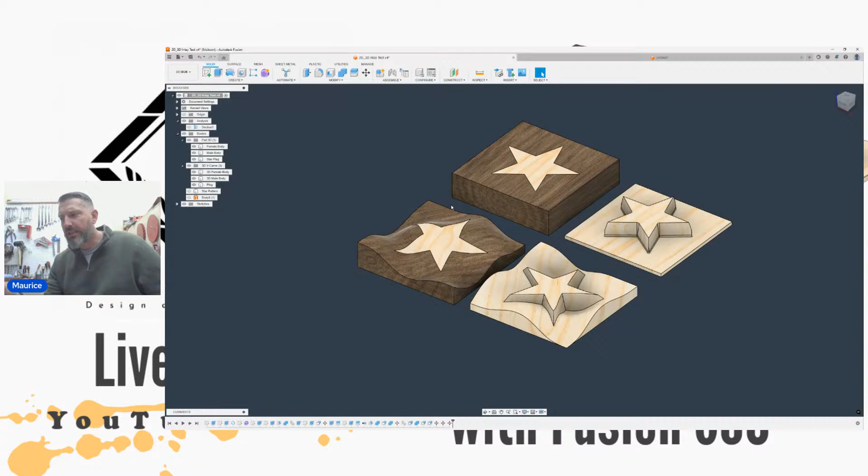So I ended up doing two versions, and this is just a 3x3 blank test that I'm going to be doing as soon as we get done with this. I was going to do it yesterday, and I ran out of time and I had some issues with my machine. So got that stuff resolved. I'm going to do this right after the live stream, and that'll probably be my next video for the entire steps for the design, and then getting into the garage and actually doing it with different tool paths and capturing all that.

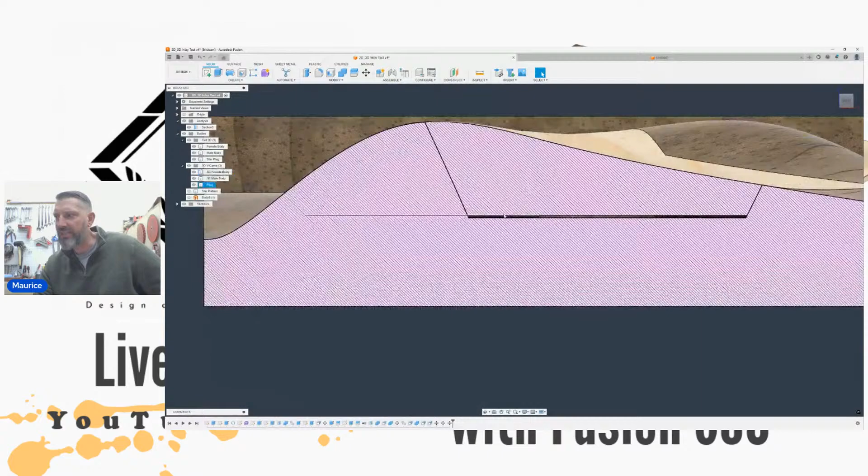So let's baseline this. Let's check the section analysis on this. You can see that I purposely left a glue seam on the bottom of this joint. Where it intersects with the male portion, the plug, and the female version, everything lines up for that curve of that surface. On the bottom, when it gets sandwiched down, I left 0.01 of a gap for glue squeeze out.

Now, I don't have a lot of history doing V-Carve inlays and the exact amount of gap that you should have and the tolerances between that. But I can adjust this later if it just doesn't work out, or if I need a larger glue gap or a smaller one. It all depends. So when I do these test cuts today and everything's glued and flat, I'm probably going to cut this board in half, just to see how the plug interacted with the female, and we'll see.

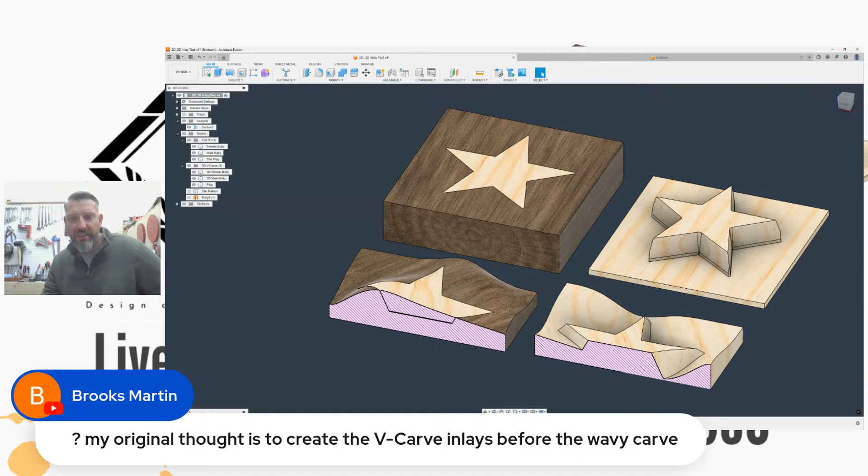So Brooks, my original thought is to create a V-Carve inlay before the wavy carve. So let's walk through that. That is the main reason why the star will come out deformed. It all matters on how the degree chamfer that you put on the plug interacts with that 3D surface. Depending on the surface, when the plug goes in, it will get deformed when it tries to go down into it, because it's entering at different points, and the chamfer is still there and is still valid.

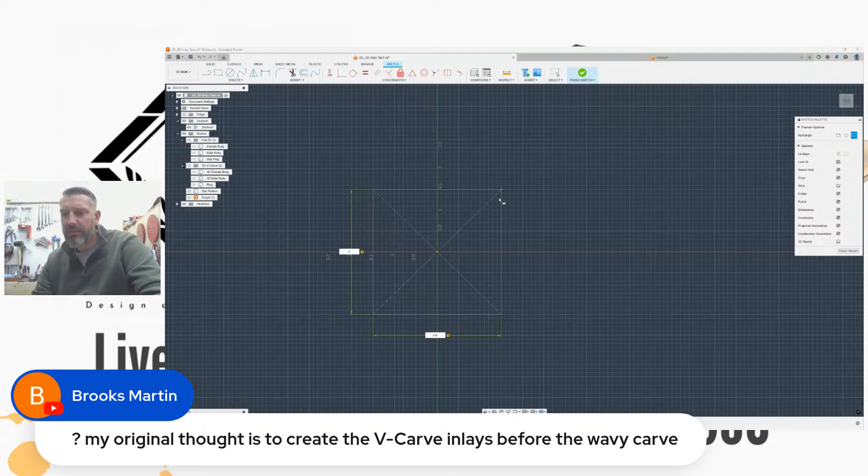So let's go ahead and we'll replicate that really quick. I'm going to hide all this stuff, and let's just do a sketch. I'm going to keep my original box of a 3x3. And then we're going to make this 0.75 thickness. So we'll extrude this up to 0.75. My section analysis is still on. All right, let's make this 0.75 thickness.

And then I already have the star laid out. So let's go ahead and we'll bring the star outline. Right now it's right on the surface. So I'm going to hide this body I just made, and I'm going to extrude this down. Let's go 0.3, 0.4. And with this, since we're going to use a 30-degree V-carving bit, I'm going to take this tapered angle and put it at 15 degrees negative. Let's go negative 15.

All right. So actually, let's bring this down just a little bit farther. Let's go all the way to like 0.7. I'm going to hit OK on that. Now, what I'm going to do is I'm going to bring this body back that I just made. And I'm going to put my 3D plane in, and I'm going to cut the actual surface out. So I'm going to use the split body.

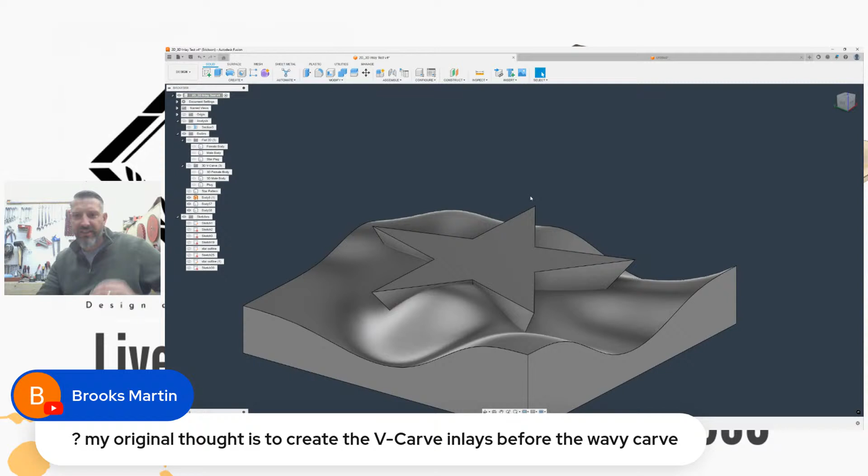But because it's constrained at a 15-degree angle, that angle enters this surface at a different degree. So what I'm going to do is I'm going to cut this into it. So I'm going to go to combine, and then the target body, and then I'm going to cut. I'm going to use this star with the angle that I want. I'm going to keep this tool. I'm going to hit OK.

So now I have the angle that I want, that 15-degree chamfer. It's cut into the material. And what I'm going to do is, I'll do that later. But because I cut it at a chamfer, you can see the outside line and how it interacts with the surface. It entered at a different point on the actual surface, and it deformed that star and how it looks.

Now the bottom of the pocket, because it's flat and it interacted with that body and it was flat, the star isn't deformed at the bottom. We don't want that. We want to keep this constrained to how it enters into the surface. So to visualize it, let's go ahead and I'll cut this star profile with the mesh. I'll extend it. That's fine. I'm going to delete this.

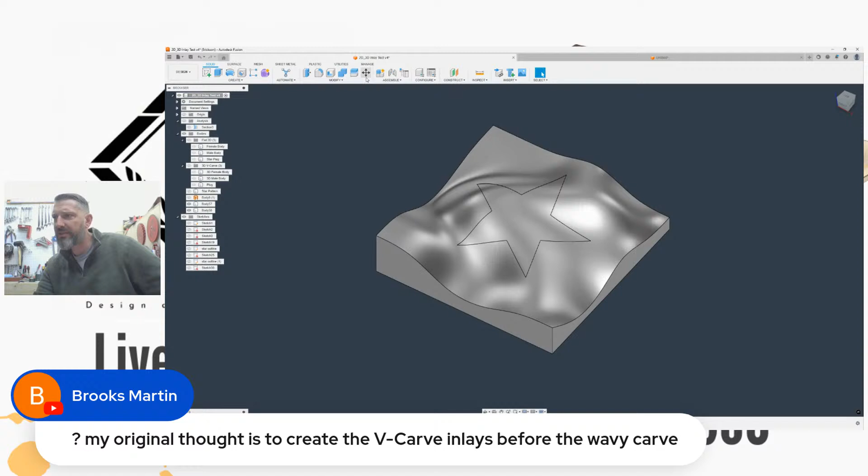So there's the star inlay. And you can see that this is just a little bit wider. This isn't perfectly flat or perpendicular to the surface. So let's put some material or appearance on this so you guys can see this a little bit better. Okay, so I went from this, and let's move this out. So we'll select this. I want to move this over. Let's bring in our 3D version. Let's get rid of that.

All right. So looking from the top on that surface, you can see that that star is 100% deformed and it doesn't hold its shape. And the hardest part too is I wanted to keep this a certain distance, especially with the American flag, and those dimensions are very much by regulation, where they sit in the union. And if you get deformed stars in there, it doesn't look right, especially when you add 50 of these at all different intersections of that surface.

And the spacing's off, the sizes of the stars are all different. And it's all due to how that chamfer enters into that surface. So that's the main reason why those stars are deformed. Now, to get around that, we have to do some interesting things, and we'll walk through it. So, I'm going to delete. Well, actually, I'm going to keep this. And what I'll do is we'll redraw this. So I'm going to do the same workflow.

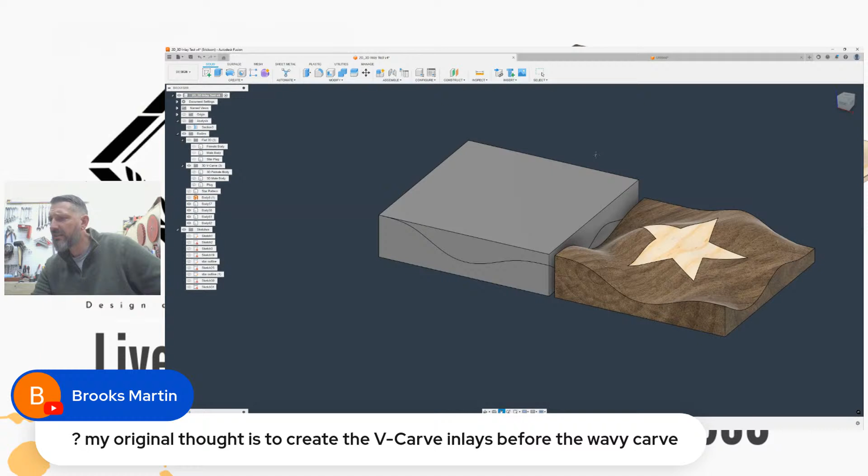I'm going to create that body. We'll do a 3x3. We'll put some thickness on it. I'm going to cut the profile out on it. Let's go to the split. Body to split. My mesh. I'm going to extend it. I'm going to go ahead and remove this.

Now I'm going to bring back my star outline. And you can see that because I removed a whole bunch of material with the wave, it sits just above the working surface of that curvature. So I'm going to go ahead and hide. We'll hide this. Bring this back. And I'm going to go ahead and I'm just going to cut.

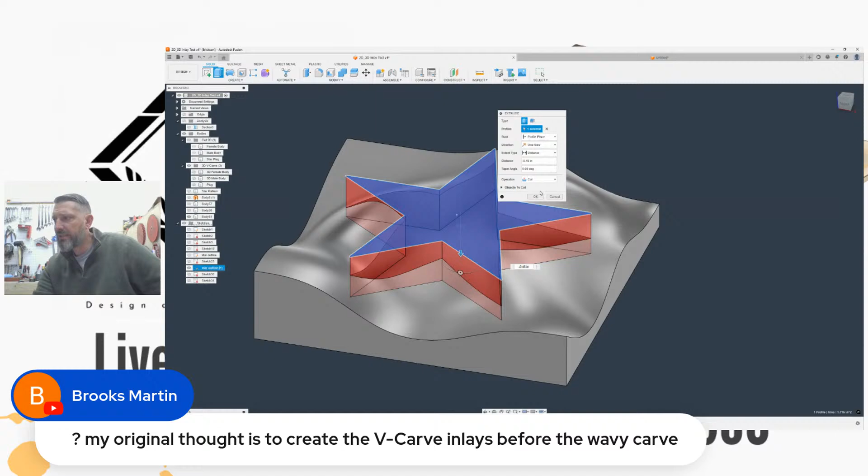Actually, well, let's do this. Let's just bring this down. That looks about a good depth. Let's go 0.45. All right, let's just cut it in. Because it's straight up and down, I didn't put a chamfer on it. The star is 100% constrained within the overall dimensions. And when it entered in straight down, it held that form.

Now, the only thing that's different is the curvature of these lines and how they interact with the surface. They look deformed when you look from an angle, but from the top down, it's 100% exactly the dimensions that you want for the star. And now here becomes the issue.

How do I make the plug interact with that surface at an angle? Fusion has some limitations on this, but what I found specifically with just the star, and the star, this drawing isn't curved, it doesn't have splines, it is very straight angled, and that becomes very, very important when you start doing a larger design or something that has a lot of curvatures. Fusion will automatically have an issue trying to project the angle that you want to set based on the overall outline of that surface.

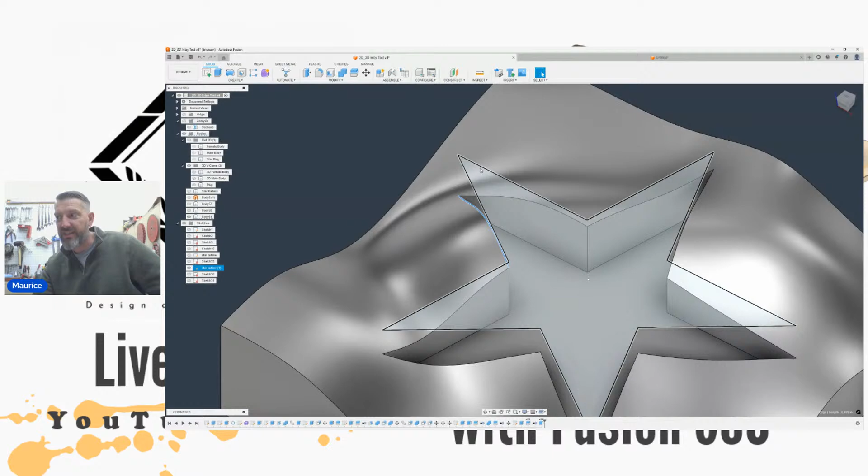And so we're going to concentrate on this surface and not this, just because I know that this surface right now is constrained by that sketch and how it interacts and cuts into it. So let's go ahead and create the male plug based off of this angle that it's cut at. So I'm going to extrude this up and I'm just going to pull it straight up. I'm going to make sure that it's a new body.

And then what I'm going to do is I'm going to use the same mesh. I'm going to cut that star out. So split body, I'm gonna select the star. I'm gonna go to the mesh, and we'll just extend it, and then I can remove this. Okay, there's my male plug that I need.

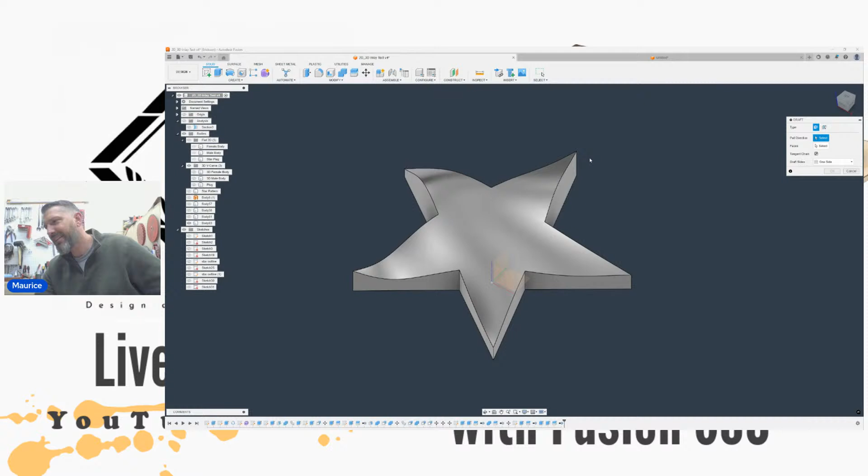The challenge is to get an angle based off of this curve that interacts with this 90-degree angle. And what we're going to use is the draft function. And this is, I think, an underdeveloped tool in Fusion that's not utilized very rapidly. But I was able to make it work to constrain this curve and the interaction with an angle taper for that side.

And so that's another thing that I really wanted to bring up too is I'm not angling it from here to here. I kind of am, but I'm not. I am angling this face at whatever degree that I'm going to cut it at. And in this case, we're going to use that 30-degree V-bit. So let's go ahead and draft this really quick.

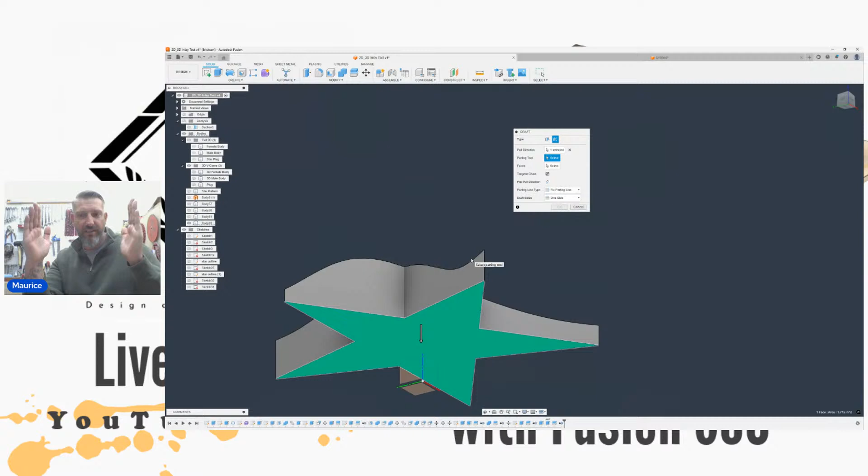So in draft, you have two types. You have a fixed plane and you have a parting line plane. We're going to use the parting line, and the push-pull direction that I need to angle off of is this bottom base to give me that 90-degree constraint. The parting tool is where it anchors down, so I can push that face inwards. So with that, it's going to be this entire profile of this curvature.

In the parting line type, it's going to be fixed. So that means it's not going to move. Nothing's going to happen to that edge when I start playing around with this. Now for the faces, we're going to select all, and this thing. Give me a second here. I don't want to do it individually. I want to do all of them. So actually, let me select the faces first. All these faces are going to have a chamfer of 15 degrees.

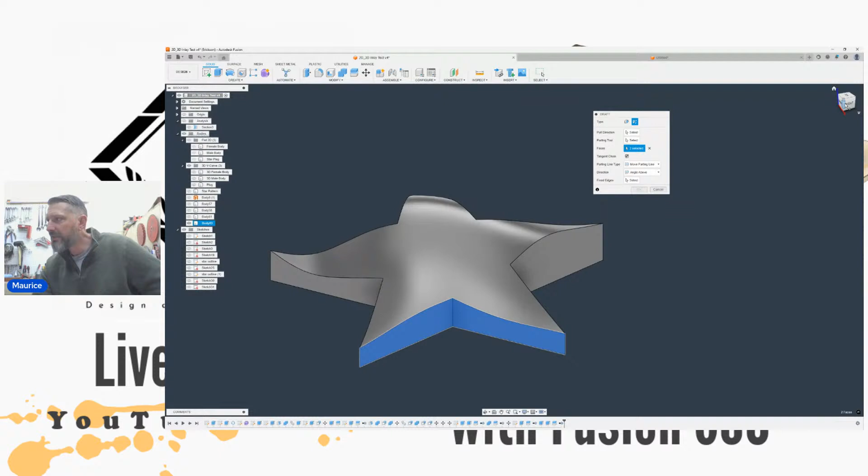Push-pull direction is going to be the bottom of this. And then we need to constrain that parting line. Now, hold on. Let's do this. What's happening right now is it's only letting me select one. So essentially what I'll have to do is I'll have to do it individually by face. And I don't want to do that. I want to do it all in one shot.

So let's go back. And it could be I just need to restart Fusion. I've been working on Fusion for like 3 days straight doing some other design work. And if something gets hung up, you just restart and then it'll kick back in. But I'm not going to restart for this. Parting line, let's do this. And then the pull direction, we'll do this. All right.

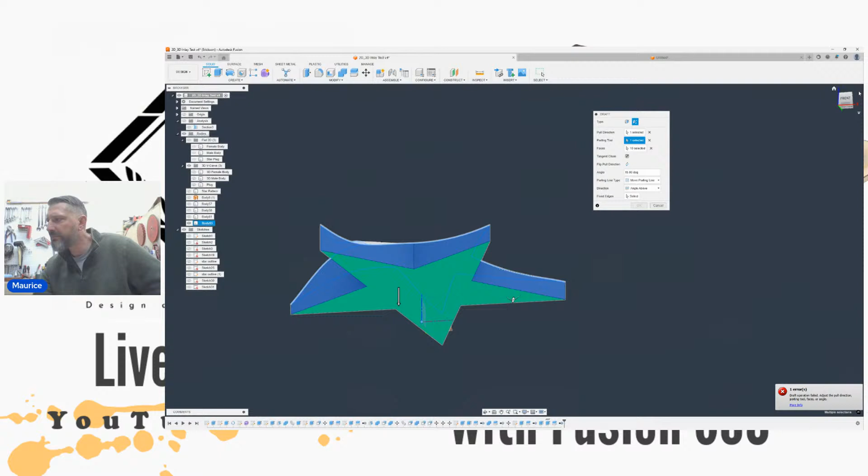Now it gave me an error. And one of the reasons why is it doesn't have enough room when it goes down to do this angle. And it's more than likely this edge that's giving me that problem. It needs to come down farther. So I'm going to hit cancel on that, and I'm going to drop this down more. Actually, I need to bring it up. Let's try it down. This is probably one of the most frustrating tools that you can use in Fusion to get to work correctly. All right, let's try this one more time.

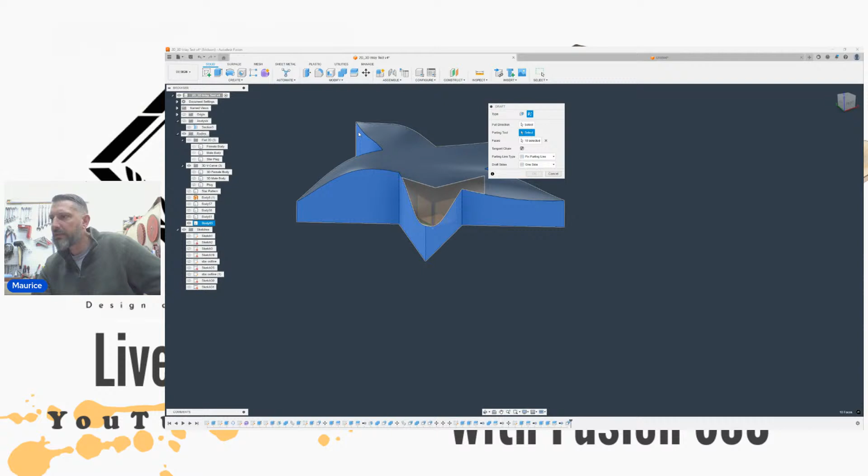All right, there is my 15-degree chamfer that's constrained by that curve. And that will put my plug in at 15 degrees all the way around the entire plug. And when it goes down into it, it gets sandwiched in between the female version and the male version of that plug. And as it goes down, it starts to get really, really tight. And the edges will conform a lot better than whether it was just a straight angle down.

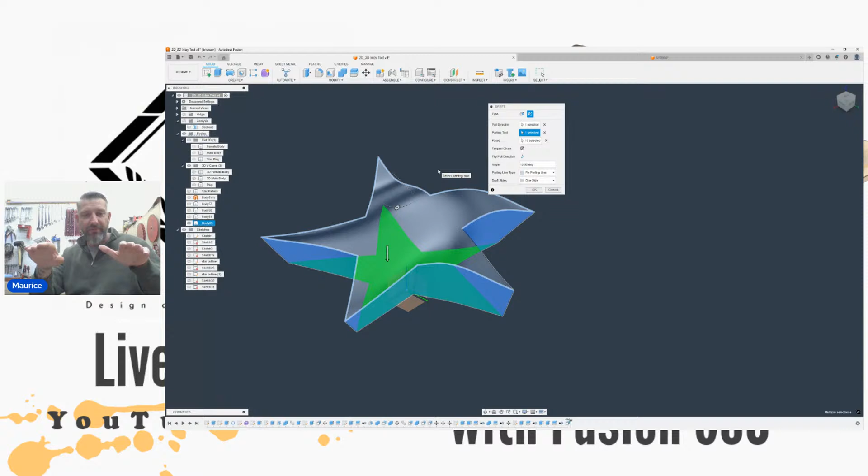I've seen a lot of people put different tolerances for a straight angled inlay. And depending on your tolerance, you're going to have to use a ton of clamps and risk breaking the material or take a press and press it down. And again, there's still a gap in there. The V-Carve inlays, when it goes in at that angle, it sandwiches itself down and it will swell, especially when you hit it with glue. That swelling tightens everything up, and if it's done correctly, you should have a very tight seam on the surface of the female version. So I'm going to hit OK on that.

And there is my angled plug that I'm going to use. Now you can see that it really deformed the bottom, but I would rather have it deformed on the bottom than on the top. And it's all due to that constraint. And I actually missed an edge, this edge. So let's go ahead and go back in and fix that. So we'll go back to our draft. We will pull from the bottom. We'll use this face, and the parting will be this edge. And I'll give it my 15 degrees. All right. I think I hit all of it.

So there is my star. Now you can see that the star edge from the bottom side is exactly what my dimensions were from my sketch. Let's pull this sketch back up. Right. My sketch lines are perfectly in line with the overall dimensions. The deformity is on the bottom side, where this interacts with how deep that angle is. When I come at it from a different angle, it looks deformed. But again, from the top down, it is 100% in line with the constraints of my drawing.

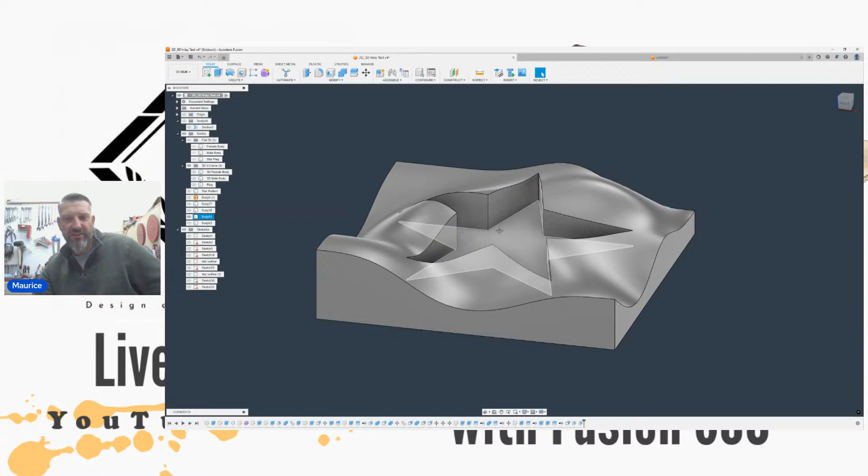Okay, so let's use this and let's see. This bottom of this curvature, since I manipulated this and brought this down farther, this plug won't fit correctly into this cavity. It just won't. It looks like it because it's constrained on the top side. But when you look at it from the section analysis, it is nowhere close to being feasible for it to actually work. So you can see that this is too deep. So from here, I can do a couple things, and we'll get it to work.

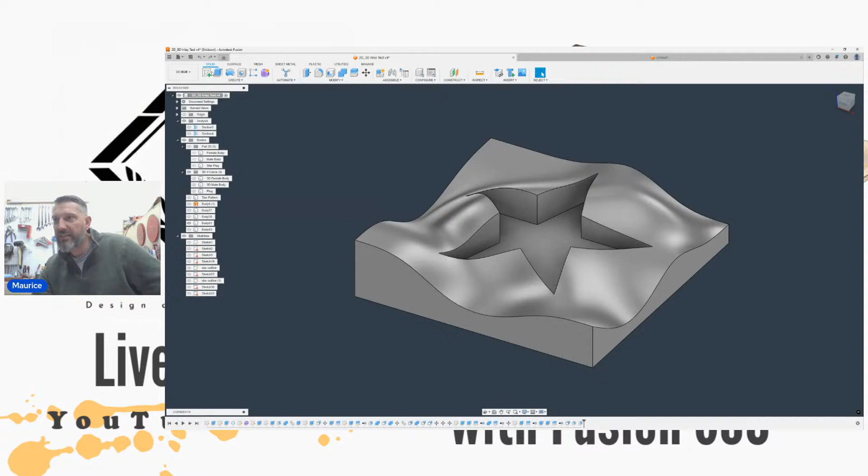So let's go ahead and hide this body. We'll unhide the section analysis. We'll fix this bottom portion. Because I know this is a known good, what I'll probably end up doing here is suppressing this extrude in my timeline. So I'm going to go ahead and just suppress it. That means it goes away. And when I suppress it, it should, no, it did. All right, actually the easiest way to do this is let's just make another body.

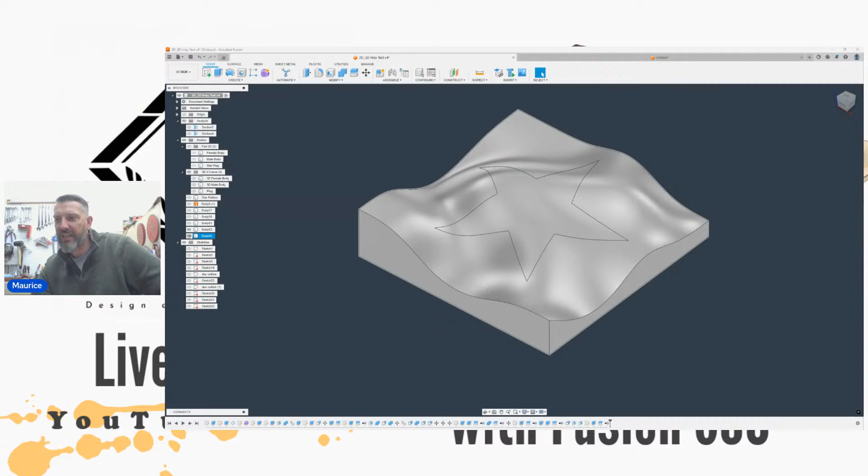We'll do 3x3. Let's go ahead and add some thickness to 0.75. We'll cut that profile out again. We'll remove that. And then that star, we'll cut it in. But before I cut that in, I'm going to bring this in just a little bit farther. The press pull keeps everything in line for me. I don't want it as deep. Let's bring this up just a little bit farther. I like it. We'll hit OK on that.

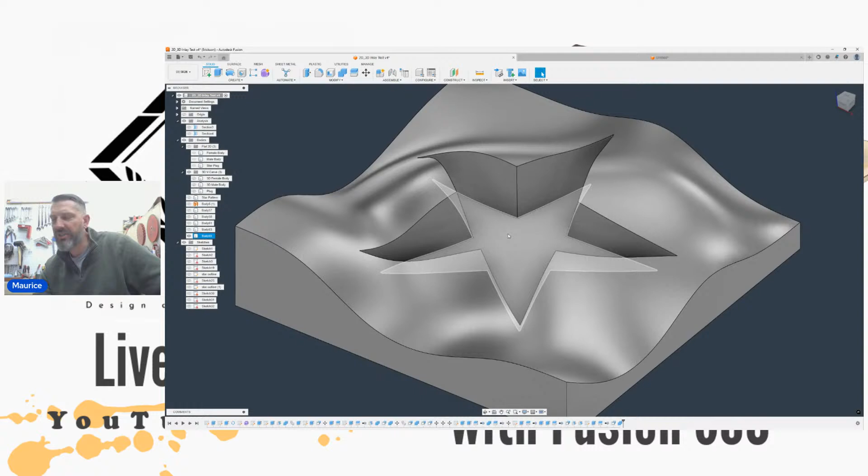And then let's go ahead and cut this profile into the target body. The target body is my base, the female model. And then the plug, we'll select that and we'll just cut it. And I'll make sure that this plug is kept. So let's hide the plug. And there is my cavity that we're going to machine into the base here.

Let me go through the chat here and see if there were any questions that I missed.

All right. Kimberly asked if I cut the stars with an end mill instead of a V-bit, would it help keep the uniformity of the wave. Well, yeah. If you use just an end mill that's straight up and down, you'll have to put an offset into your male plug and cut it at the same angle that you're cutting at, which would be 90 degrees. Depending on the tolerance, there will be a little gap when you put the plug in all the way down, and it affects how tough it is to actually get that in.

And I've seen a couple people that press those straight inlays in, and they're at like 0.003, if not smaller, of a tolerance. And the glue will push up and it will seal it and it'll be in there. But when you really dig into it and look at it, you'll see that gap. And sometimes with glue, depending on the tint that's on it, you really can't tell.

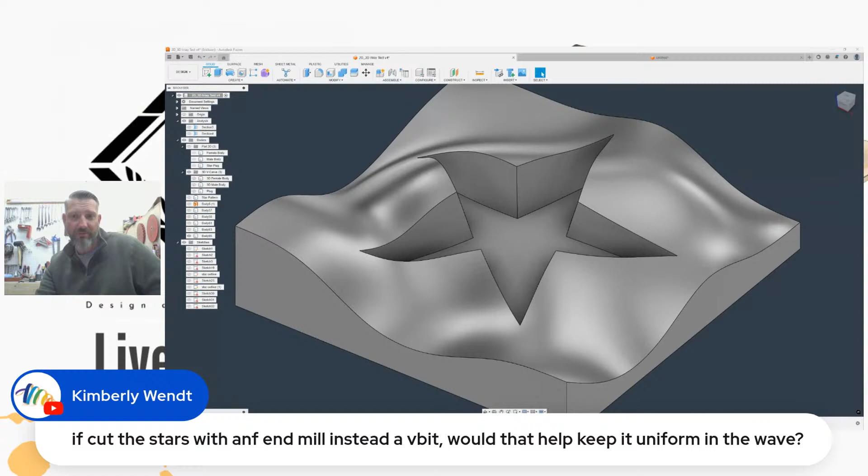But when you get really close, we can definitely tell if it's not an actual V-carve. So the V-carve is basically the most preferred to get around that, to make sure that all the edges are very seamless.

And let's see, Brooks. Have you tried using a tapered ball nose? I don't know if that was the question in response to Kimberly. Yeah, so there are some considerations that you have to take into account for sharp corners, and the differences between that engraving bit and the tapered ball nose. That ball nose has a radius at the very tip. This is a tapered ball nose.

This is an Amana 46280. This thing is a workhorse, and it looks like there's a fine tip on it. In reality, it's not. There's a radius there, and that's why they call it a ball nose. And this radius is, I think, 1/64th. When it interacts with an edge and it comes out, it's still not a direct point that you would get from a V-carve engraving bit.

The other Amana tool that I have, specifically for this one that I'll cut this surface out on, comes to a direct point, and when it interacts with this edge, it will drag that fine tip along this entire edge, and it will engrave that out, leaving me with a very fine tip interaction with that surface.

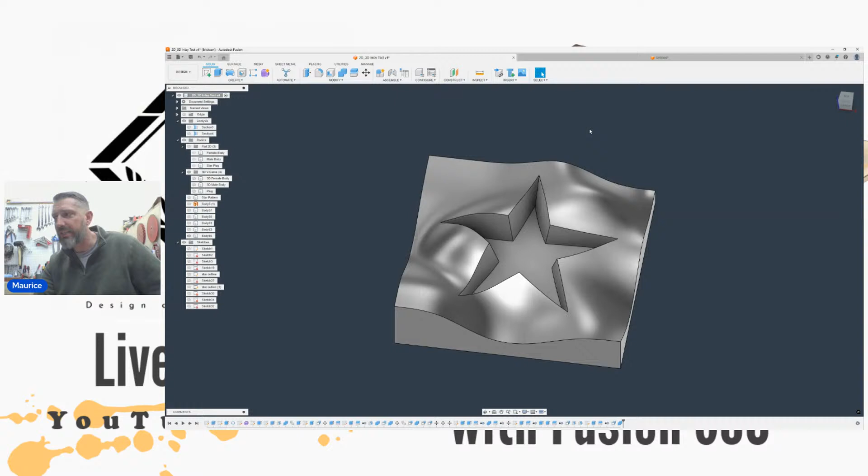And when I do these test cuts, when I do the 2D version and show the toolpath for it, you'll see how that ball nose interacted with that space and how it dragged along the edges of these chamfers. So we'll bring that up now, because we're basically done, other than doing the female portion of this. So the easiest way of doing this is I'm just going to push this upwards, and I'm going to leave a gap.

This gap is very, very important for two reasons. One is you've got to have material out where you can, especially if it's flat; with this being a curved surface, it's a little bit different. But you want to allow space, because when you press it down, it's going to press all the way down, and you've got to leave a little bit of room so there's no obstruction.

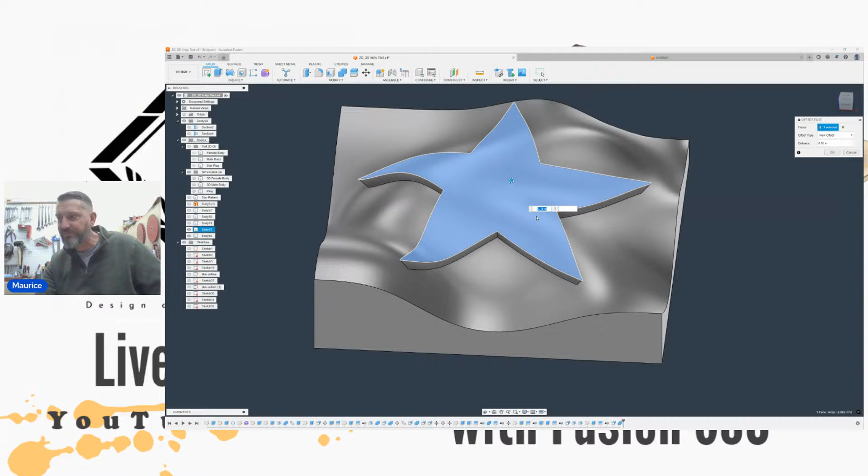So I'm going to go ahead and hit OK on this. And I'm going to find the remove. Let's suppress this. Oh, the wrong one. Which one was it? No, wrong one. This one. All right. So now this male plug profile, I'm going to bring upwards. This was the exact mesh that I had that cut both ends out, so this is the reverse side of this profile. I'm going to move this up 0.1.

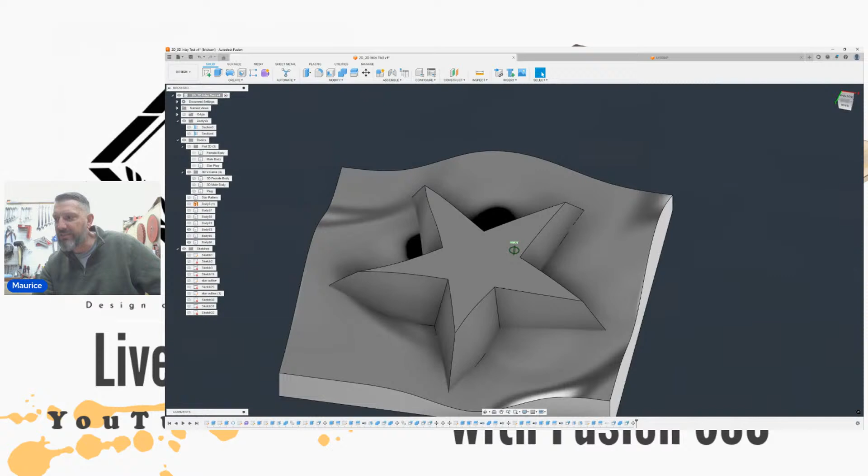I'm going to hit OK on that. And now I have the contour of this surface being the same as this bottom surface, and the plug interacts with both. So I'm going to hide the bottom, bring this top back up, and you can see that I'm cut into this, but it's not one, it's still two pieces.

So I'm going to go ahead and combine these two together using the combine tool. I'm going to use the target body, the tool body, and I'm going to keep the tool, and we'll hit join. So now it's all one piece. So there is my reverse cutout of that star.

How it interacts with the bottom of that plane, and the cutouts for the inserts. So let's go ahead and let's do a section analysis of this. So let's bring back the two bodies. And I don't want to thread. Close that. Let's go ahead and inspect. We'll do section analysis. We'll check this face, and then we'll bring this in. Let's hit OK on that.

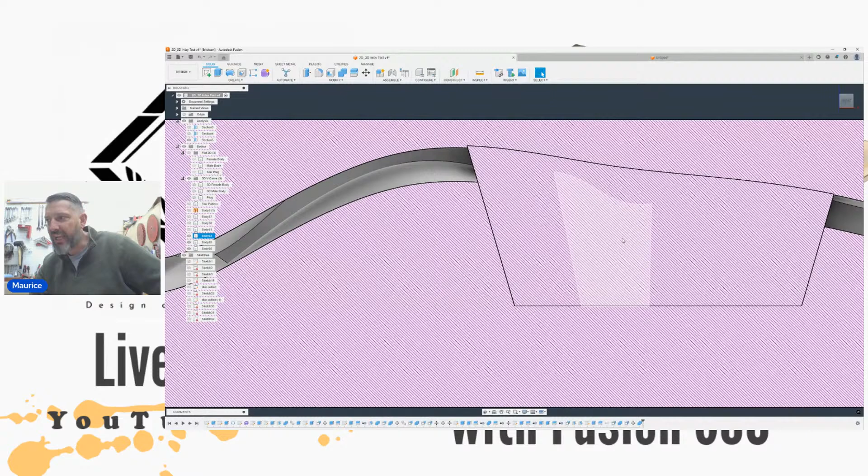Now you can see the plug interacted with the entire surface, and I have a clean version of where it interacted with both surfaces. The only thing that I haven't done yet is I haven't left a glue gap yet. And the glue gap is 100% important for the glue. The glue has to go somewhere. And if you don't leave a gap, the glue will want to push that plug back out, and it will deviate from this line. The edges and how it interacts, it won't line up correctly.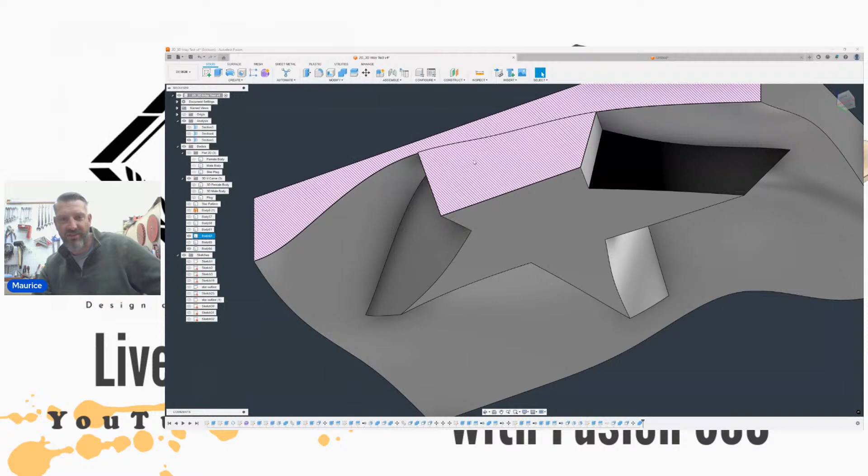So let's leave a little bit of space on this bottom portion. So what I can do is I'm just going to go ahead and hide this bottom. We don't have to worry about section. You can actually do this with section analysis turned on. All it is, it's running in the background. It has nothing to do with this overall body. It's just a different view of that model. If you want to see how this interacts when I bring this up, yep, it can definitely do that.

So let's go ahead and we'll press and pull this. Let's go 0.01. I'm going to hit OK on that. Oh, actually, let me hit undo. This is a pro tip: you got to make sure that you do new offset on your body. You can do it where it's automatic, and it will take your entire history of what you've been doing to that model and how it interacts with other surfaces. Or you can do a new one where it doesn't do that. It doesn't bounce it through the entirety of your history.

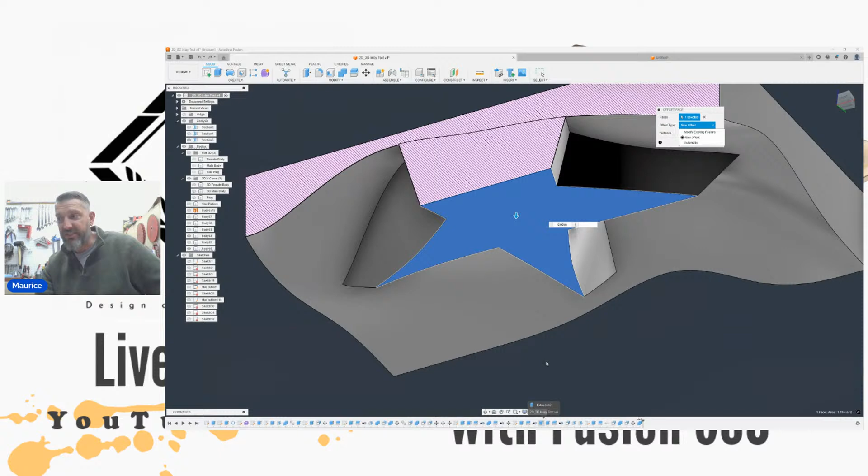The history that I'm talking about is on the bottom here. Every action that I do in Fusion will record it. And so if I edit way back in my timeline of a sketch and I do something, it will update this entire history to account for that one change. It's a great feature, but it can really throw you off if you only want to do something very specific at a certain time where it doesn't interact with the rest of the history. So when you're offsetting a face, always new face.

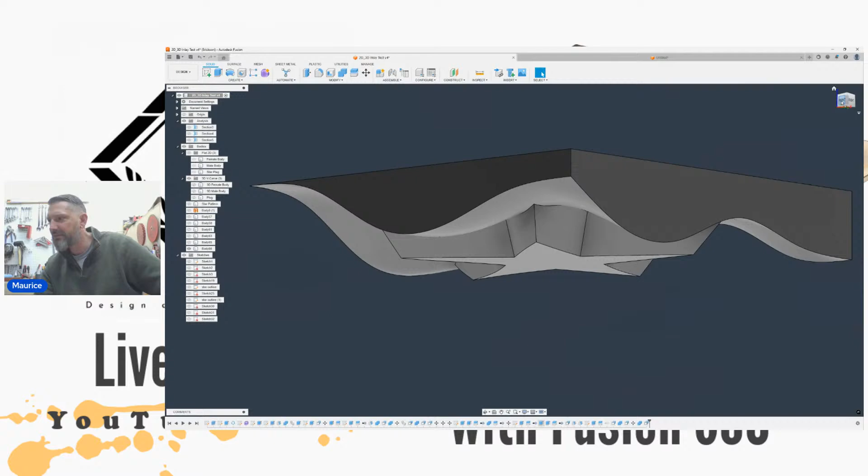So I'm going to turn the section analysis off. So let's go ahead and we'll bring this up 0.1. And so what it's doing is it's cutting this material off, and I don't have to worry about any of that. So I'm going to hit OK on that. Why did you make a new body? Oh, I had the male plug cut out. I'll hide that. So now you can see that it cut that material out, and it's good to go.

So now, let me hit my home button. Let's bring back in the bottom, and let's check our analysis. So now you can see that I accounted for all of the glue gap. Now the glue gap interacts only with the bottom of the surface. The side of the angles downwards, it doesn't have that. So let me edit. Let me bring this analysis over to a different spot. So you can see that it still maintains that bottom, but not the angle. Only the bottom of that surface.

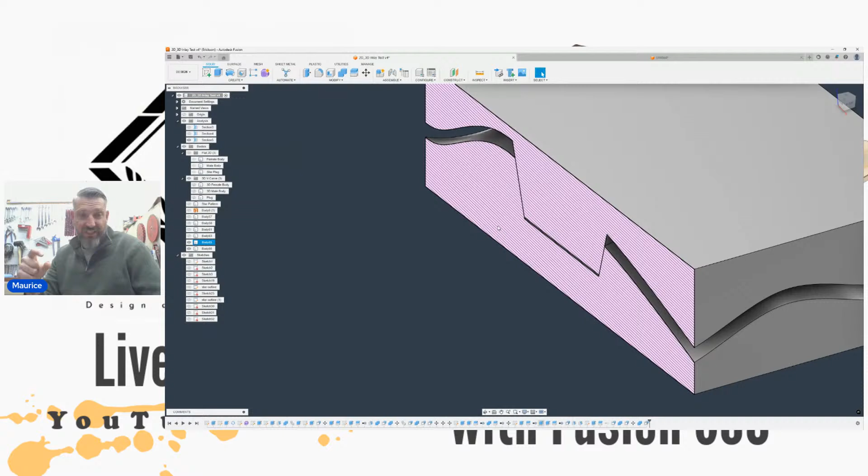Pretty cool stuff. And again, that plug is different on that surface the entire time. So you can get the reassurance of having the 3D model where you can view it, and doing the analysis gives you that warm fuzzy before I go into hard material. I know that there's a certain probability of success that this thing's going to be successful. Very, very powerful tool. Okay, so that's basically it for the modeling to do that plug, how to do it correctly.

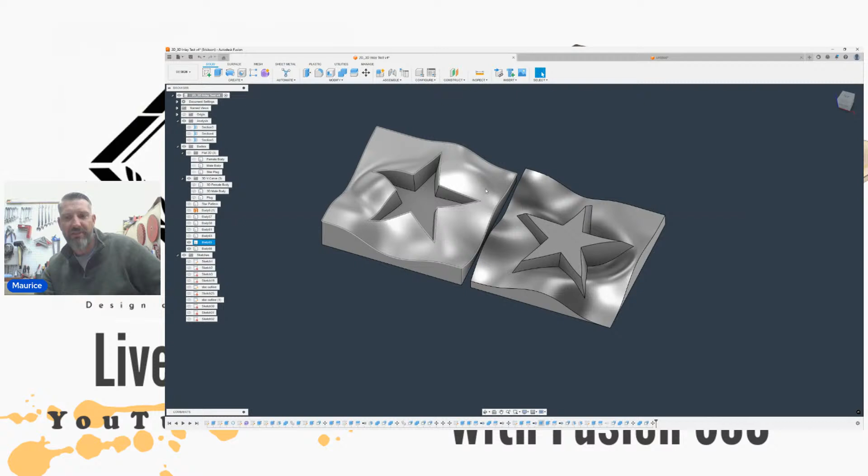But the real results is getting into the garage, getting it onto the CNC, and programming and having the CNC actually cut this thing out. So what I'm going to do here is I'm just going to flip this male version 180 degrees, and I'll bring this over, and we'll bring this up, and there's my flip. So when I enter into the machine, these will be how my material lays into the actual CNC.

Okay, that's the basics of doing that model, how to constrain that curvature and how the star enters in to maintain the actual distance and dimensions of the star. The hard part now is programming the tool paths. And there's a difference between a 2D toolpath and a 3D toolpath in Fusion 360 and how you set it up and how it interacts with the material and trying to make it work for what you want it to work. There's very specific settings that if you choose a different setting, you'll get a completely different result. So there's a lot of play.

I spent a good portion of an entire day trying to figure out how to do the tool pathing for this. But once you get it, it's almost second nature and it makes sense after looking at it. Okay, so what I'm going to do is I'm going to close this out. I'm not going to save. I'm going to bring this back up. Okay. For the 3D modeling, that's basically it. Let's go ahead and we'll go into the tool pathing. And let's work on the 2D version first.

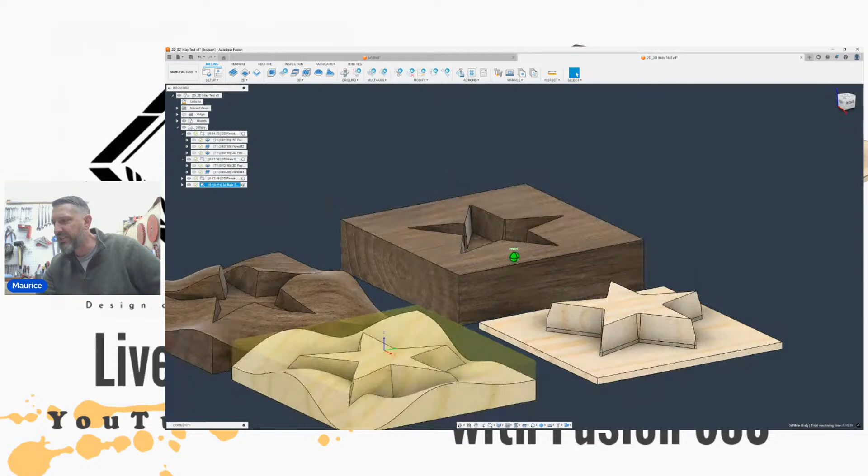And the process that I used, again, so I made a conscious decision just to try the tapered ball nose. And you'll see just how difficult, because this plug, just when you look at the plugs, how this angle is different than this angle, it threw me off because this corner or this edge is 6.2 degrees on both sides. When I pushed these in, it changed this bottom, and this angle that you look at from the side is not 6.2 degrees that you would think of.

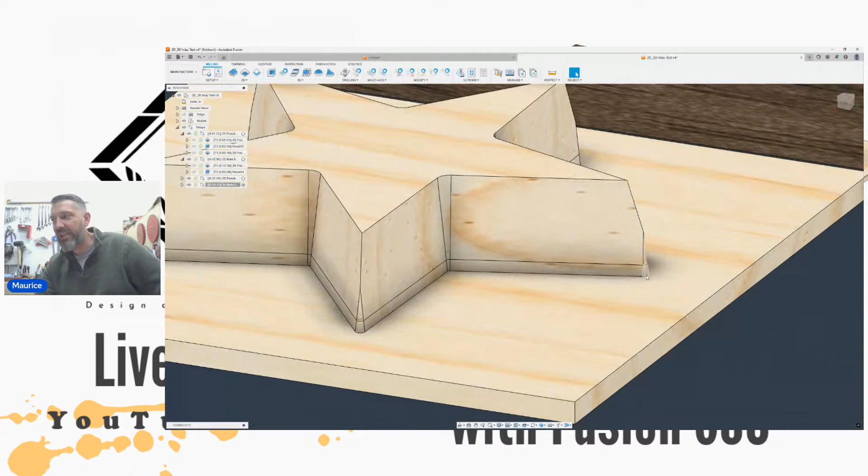It's different. And when I accounted for the tapered ball nose, where I couldn't have that really sharp edge, it changed the geometry and how it interacts with these edges pretty significantly and how the tool interacts with these corners. And so this tapered accounts for the taper, this corner, and how small it gets on the bottom, and then how it interacts and it cuts that material out. If I was to pull that tapered ball nose straight down, just along one edge, it's not going to cut this top portion out all the way based on the radius of when this tool reaches that point. It still needs to carve a little bit out, and we'll kind of go through what that looks like.

But that's why these radiuses are here. This accounts for that tapered ball nose. It should, in theory, and I haven't tested it out yet, it should carve that exactly the dimensions that is depicted in this drawing. Okay, so the first tool operation that I did was just a basic clearing operation. And what I did is I made sure that I left meat along this edge. I wasn't really concentrated on this corner. And what I can do is I'll pull the settings up here. And this is just a basic 2D pocket, right? It's not doing anything crazy. I picked the bottom face that it was going to be constrained to.

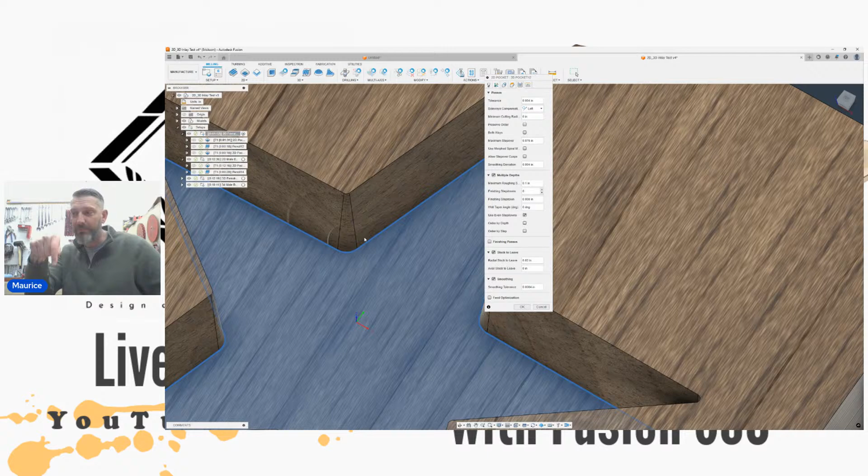The most important part is my stock to leave, where I told it that it was gonna clear that entire bottom of that pocket out, but it was gonna stay 0.02 away from this wall. And this top portion of this wall is not 0.02. Remember, it's at an angle. When the tool comes down, it's going to stay 0.02 away from this bottom edge. So I can control how it interacts with that material very, very pinpointed, where I don't remove this material and I'm going to let my ball nose go in there and clear the rest out. I don't want it to interact with that edge.

Not as important when you're interacting with the male body, but it means a lot when you start getting into this. And if you run that tool path and it hits that wall at the wrong time, it's gonna hurt and it's gonna chip out, and you're not gonna get the results. Okay, so I'm gonna hit cancel on that. Well, let's see. Yeah, the stock to leave.

I did a 0.1 step down. Those were the only, and other than smoothing, I checked that. And what that does is it corrects jaggedness in your tool path. You'll notice a couple machines will start going like this, because it's trying to follow the contour of the profile sketch. And sometimes it gets really crazy, jaggedy when you do that. So if you hit smoothing, it will account for the deviations, and it will be one really smooth tool path where your machine interacts and it's not so hard on it.

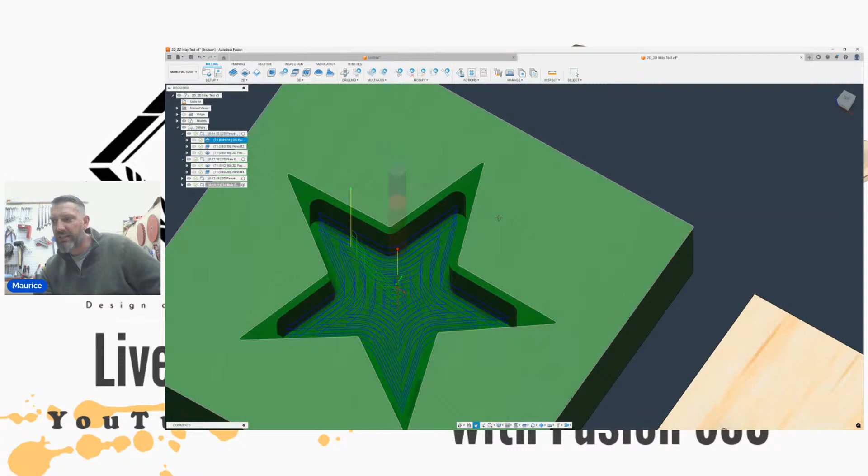For the linking, I made sure that it was a plunge cut and I didn't change anything else. What that gave me was a basic clearing operation to get that material out. And then it saved meat for my ball nose to go in there and eat that out.

So the next one that I did was a 3D tool path, and it's called pencil. And what pencil does is it accounts for all the edges in a 3D environment where it will machine those really, really hard angles that you can't really get to. And it does a really good job on projecting it.

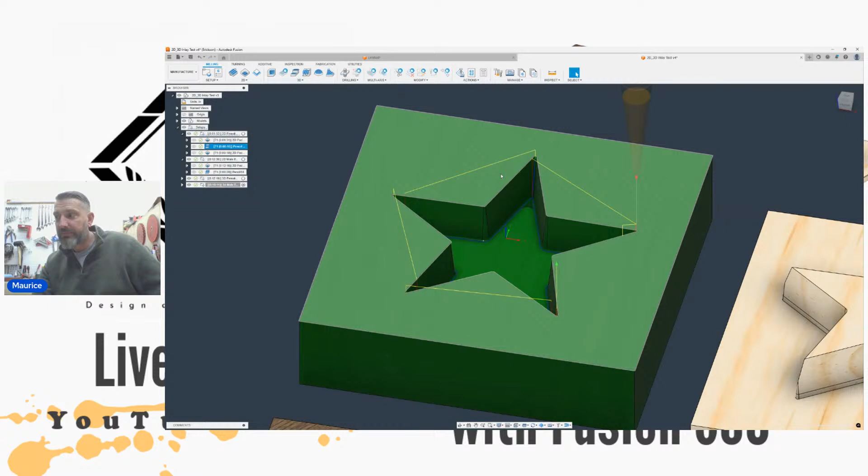If I was to use the engrave tool on this, because I'm using a tapered ball nose, Fusion doesn't like that there's a radius there, and it can't calculate what that radius is for the engraving. If I was to use an engraver on this, I would just pick engrave, and it would cut these angles out for me. No issues. As soon as I pick ball nose, it will error out and won't calculate that tool path.

So because I'm using the pencil, all I had to do was select my tapered ball nose. When I came to geometry, I constrained it on the inside boundary of this edge. So no matter what, my tool will not deviate from that edge. When it goes down, it will hold that taper, and how it interacts. Because again, this is smaller than this top side. It will interact a certain way and it won't deviate, and it's completely constrained within this environment.

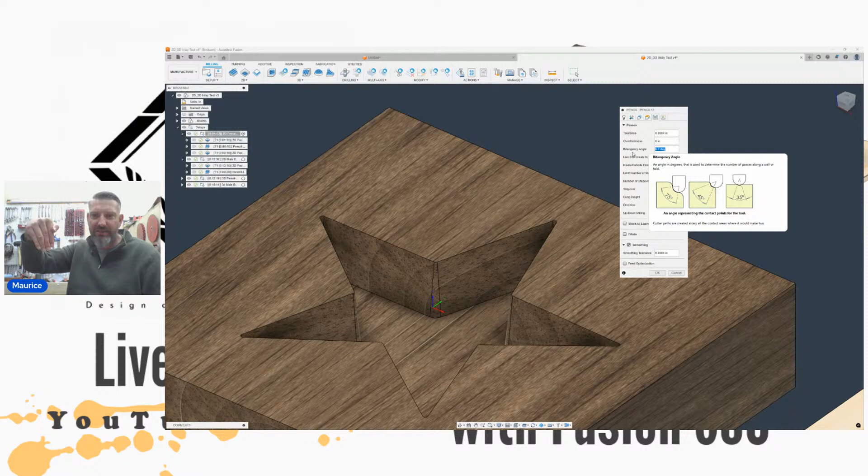From there, for my passes, didn't have to change anything. I did change this. It's an angle and degree in which the taper ball nose enters downwards, or the degree of cut. I just matched that with this overall tapered angle. And another really good point, and I'm going to bring this up because this took me a second to figure out.

Let's deep dive into this tool and why it's so painful trying to program these things in. The tapered angle is 6.2. Okay. Your 30, 60, 45, or whatever engraving bit that you use, it's the overall angle of that, right? When you divide it by 2, it'll give you the angle from 90 degrees based on whatever that angle is. And so for a 30 degree, even though it's 30 degrees like this, it's 15 when you account for the other half. The tapered ball nose isn't like that in Fusion.

What it does is it accounts for the half of the overall angle. So it's already programmed into 6.2. Being intuitive, you would automatically think, well, if this says it's 6.2, I would divide that by half, and that 3.1 would give me this angle on this side. That is not true for this bit, in Fusion anyways. So the middle portion, that's 90 degrees, and this angle that's coming off of it is 6.2 degrees.

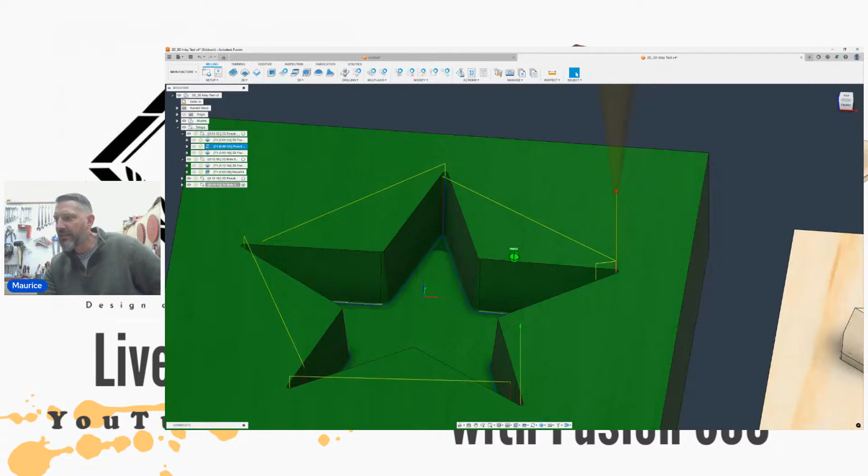So I made sure I captured that on how the tool interacts with that chamfer. So that's why I set that to 6.2. And I made sure that I clicked smoothing, and then my retract policy, I kept it at a minimum. When I hit OK on that, it brought in this cut. So it plunged all the way down, and it removed that material on that wall, and it followed this profile. And it used the entirety of that tool to do that.

So let's go ahead and simulate this. So I have this as transparent. Let me get back here. So this is the excess material that didn't get cut by the previous tool path that I used. And then you can see my edge of the overall model. So let's go ahead and we'll run this. I'll make sure the accuracy is turned down so it's not so choppy. We'll turn this down. Okay.

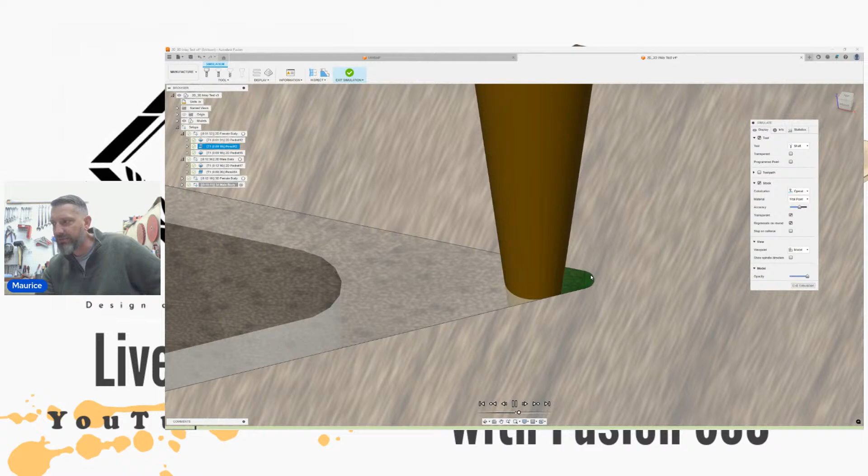So you can see my ball nose, that radius. This radius should match and how it interacts. We'll go a little bit faster. And you can notice that it did a little bit of a spiral here just to make sure that entire area was hit.

It's taking it along that edge. And we'll speed this up just a little bit. And it's hitting all of those lines, and it's machining, and it's constrained on that wall. Now you can notice that it skipped this corner. It's going to come back later, and it's going to gouge that out. And it comes down to tool deflection, and I really like that it stopped and it didn't hit that, and it'll come back later and it will take it out.

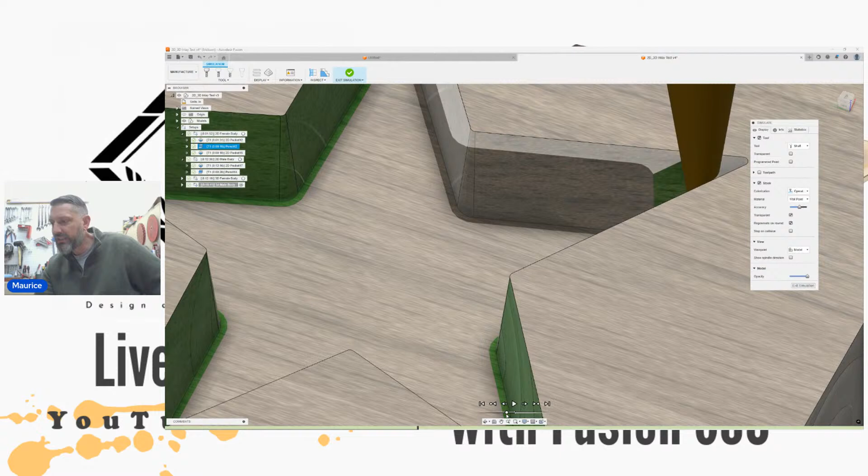Let me show this. We'll go back on this corner. Let's check this corner out. This radius, 6.25 or 6.2, with a fillet that matches the overall profile of this tapered end mill. Comes in, it has the touch points on that corner and it has the touch points here. And then what I'll do is I'll come back over and I'll make sure that these corners are 100% cut out.

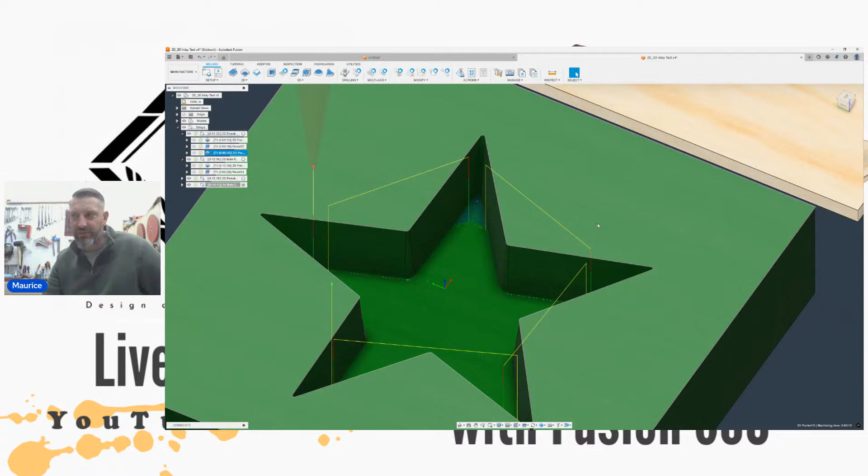Okay, now there's still a little bit of work here. What I ended up doing with the same tool, I came in and I ate the rest of the material that when it did that profile, it left. It was a couple islands that it needed to come in. So same concept. I used a 2D pocket, came in with the bottom surface, but I made sure that I hit rest machining. And the tool diameter depends on the prior tool that you used. This default of 0.2 made my tool path a little bit more rigid, and it hit a little bit more area to make sure everything was cleared out.

With this, because the majority of the material is already out, I didn't have to do a step down. So it's going straight in, and it's just going to clear that material out. I changed the ramp instead of a spiral to a plunge, and I hit OK. And what it did was it came in and it hit the previous islands that were left over. So we can simulate this. And yeah, we'll come right in and it just eats that material right out.

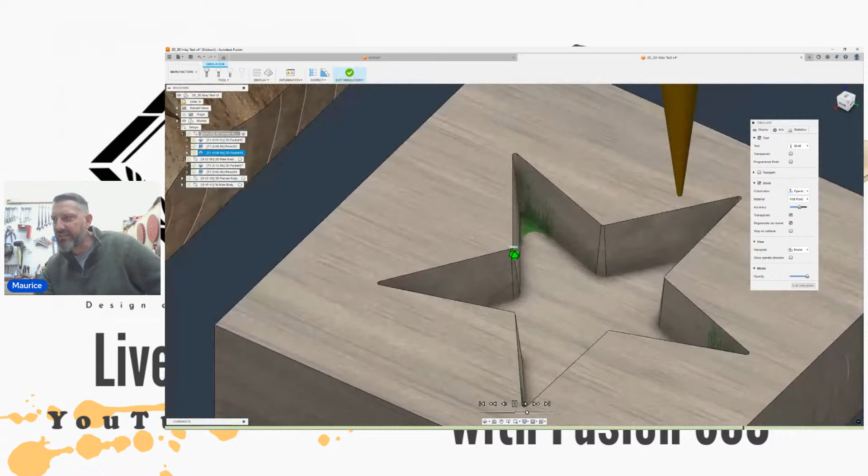Doesn't interact with the wall. And if I wanted to be really careful, where I didn't want to hit it, I could define that it cannot touch that wall. I can put a hard constraint on that if I wanted to. But again, it's not eating any material out, other than those small islands that were left over. Okay, so that's the female portion.

Now for the male version, it's basically the same thing. I used a 1/8" end mill, and I came in and I cleared all this material out, but I made sure that I didn't interact with this edge. So I left an offset of 0.01, and the offset is the bottom. And then I wanted to take all the radial stock out. It's gone.

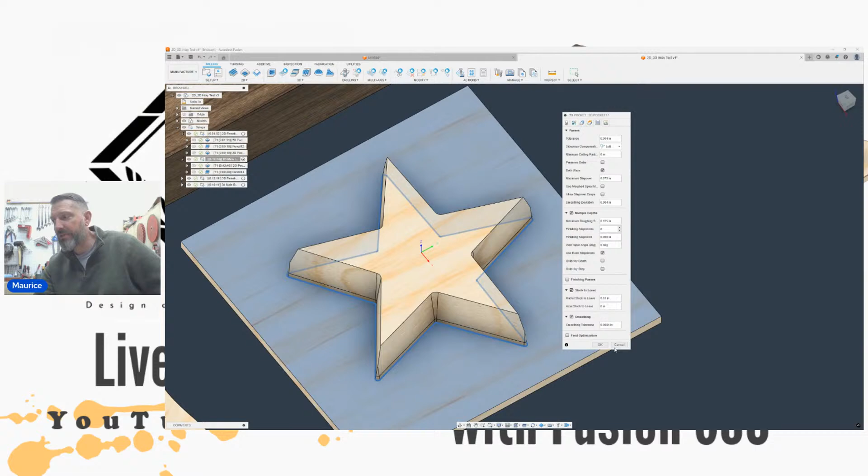The question that most people will ask, and I had to double check this again, is remember that I took material off the top of the star to give me my glue gap. It was like 0.01. When I did my initial setup for the stock, we'll look at it from the other portion. My stock is zeroed right on the top of this surface. So when it does this machine and it eats all the material out, it's already accounted for in the overall setup.

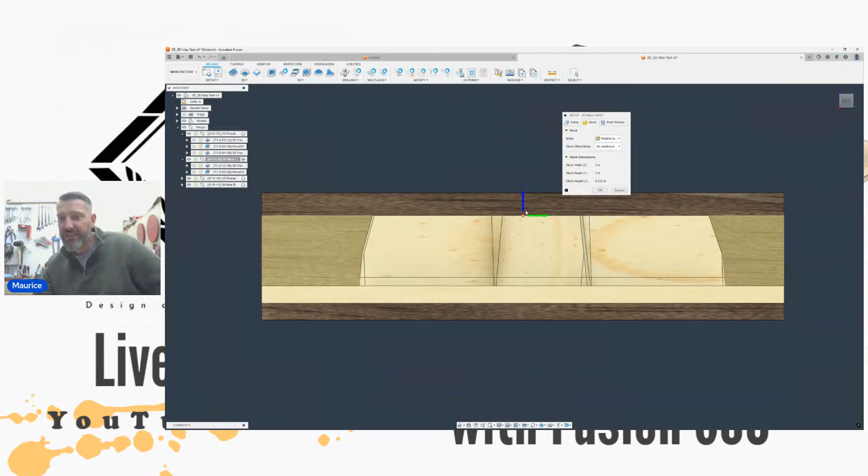Say if I didn't want to account for that, I don't know why you would want to do that, but you could come in here and add stock, and you could see that it left a little bit of skin on the top portion. That other tool path will account for that, and it will clear that off, because again, you have to come in and take that material out. Easiest way is just make sure you don't have any additional stock, and you use the top of that 0 as the bottom of that cavity. Okay, I'm gonna hit cancel on that.

All right, so that's the tool path. It left a skin along those edges. And then I came back with the same tool path of that 3D pencil, still having my tapered ball nose. My machine boundary was, I actually used a different thing. I didn't put a boundary on this one. I used the avoid machine surfaces. So I came in

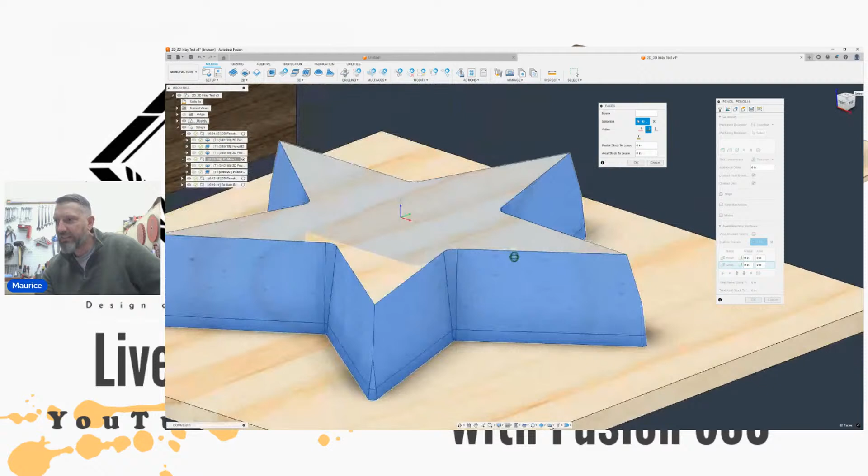And what we can do is I'll edit this. And so you can see this. I can't remember if this is available on the free version. I'm on a paid version. So I can literally go in and I can depict what edge, what surface, what portion of the drawing that I want to machine. I don't have to let Fusion guess on what I actually want to machine. I can hard constrain it, and select each one of these faces for it to come in and do it.

And you can do the opposite, where you can say, I want you to avoid this corner or this edge or whatever the case is. You can define that in that toolpath. I'll hit cancel on that, but regardless, I constrained it to where it's only running along this corner.

Same thing with the 6.2 degree angle. No multiple step downs, and I kept my retract policy at a minimum so the tool would stay down. And then this generated this. So let's go ahead and we will simulate this.

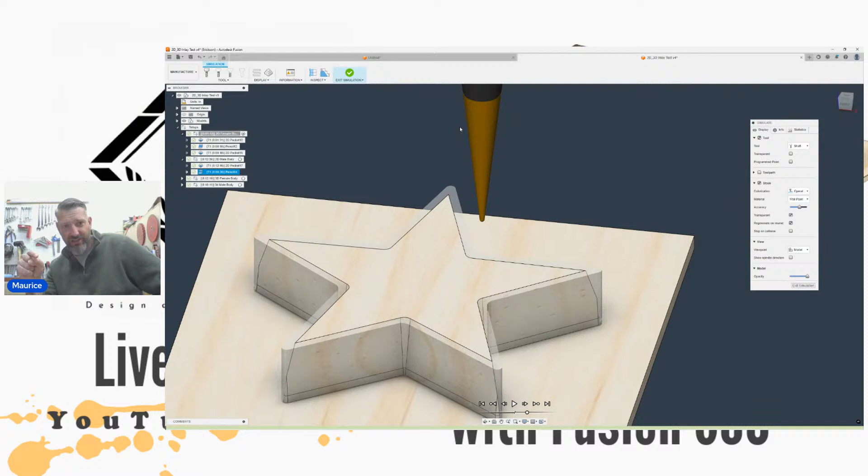Now, this radius, a little bit different. The tool understands that this radius is still a little limited, and extra attention needs to be taken into account to make sure all the material is removed on this. And again, this is the bottom face, not important, but you can see how it does take it into account. All right, so we'll slow this down.

Enters into the surface, and then it's going to come back up. It can't hit this radius for some reason, can't hit exactly where it needs to be. So it's going to do a couple passes here, and it's going to make sure that everything is cleaned out. Once it does that, it will go into the normal tool operation, and it will take this entire radius out.

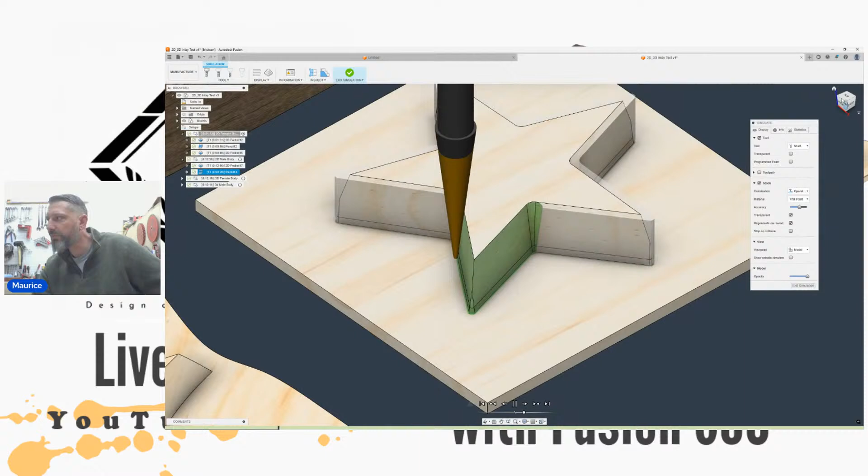That is the male plug for that insert. And again, it's going back in and it's just massaging those corners just to make sure all the material is all the way out. Now, while this is working, you can see that there is a little bit of material on this bottom side because of that radius that it's doing this when it cuts it.

This is the reverse side of that cut. So this would technically come up and it would plug in. I left 0.01 distance in between this edge. Well, actually, you can see it here. So this is the surface of my female surface here. I left that 0.01 to account for that distance of that radius.

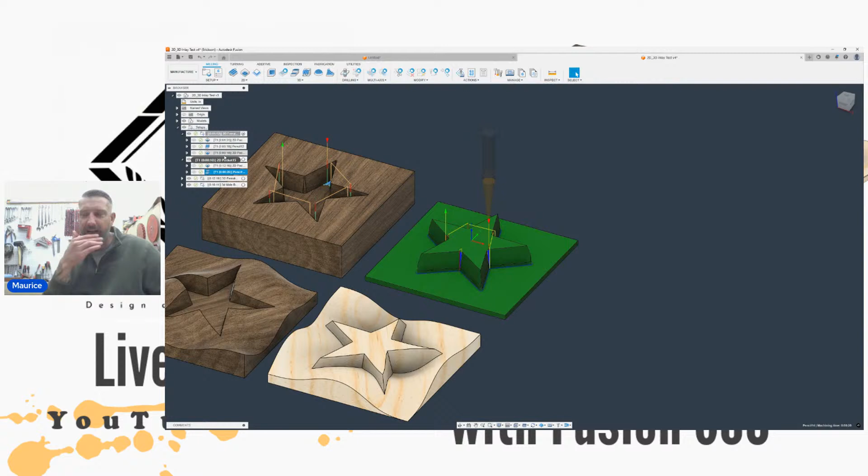The 3D version, it's basically the same thing, other than I have to cut this 3D profile out. So before I decide to go in and cut that crevice out, I'm going to put that 3D profile with a tapered ball nose, and I'm going to cut all that out and produce that surface. After that, I'm going to come in with my normal operations that I would do for the 2D, clear all that material out, leaving the thickness around the edge. And then I'm going to do the same operation for the engraving.

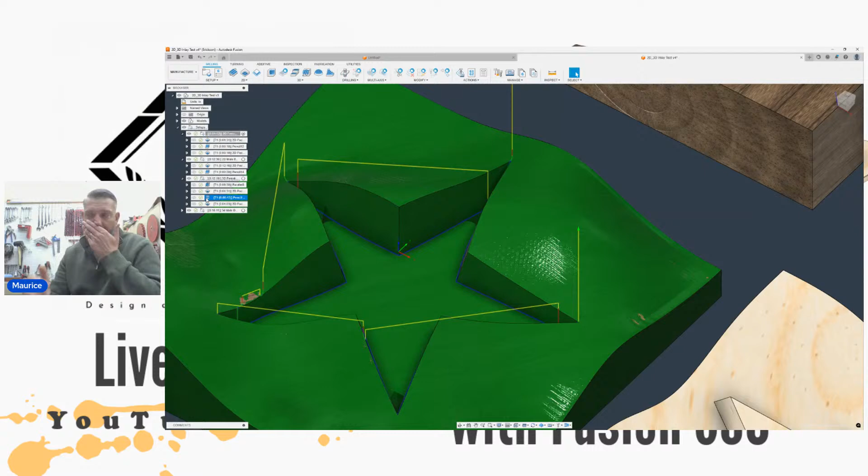And now the pencil tool doesn't matter. You can have a tapered ball nose, you can have an engraving bit. They operate at the same constraints, not like the engraving tool. So with this, let's run this, and you can see how that engraving interacts with the edges. All right.

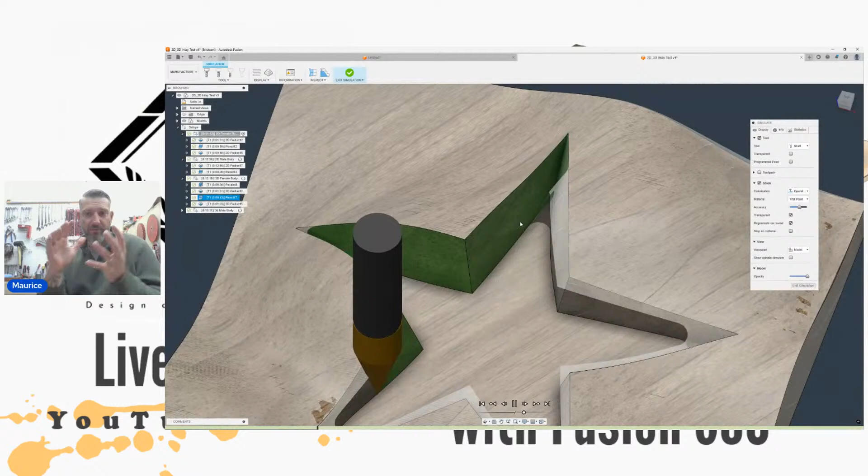Now you can see it left a little nugget there. If I'm looking for a really, really tight joint, that little deviation, it's going to shift and it might not fit correctly, or it might not be as seamless as you want. What this bit is going to do is it's going to come back in and it's going to eat that out. Same concept as we had for the 2D version.

And see if I can capture this. Oh, that's okay. I know why that's like that. There's an accuracy setting in simulation, and this is actually really good to know. If I turn my accuracy all the way up, it will account for exact measurements of that model. If I turn it down, there's a little bit of deviation there.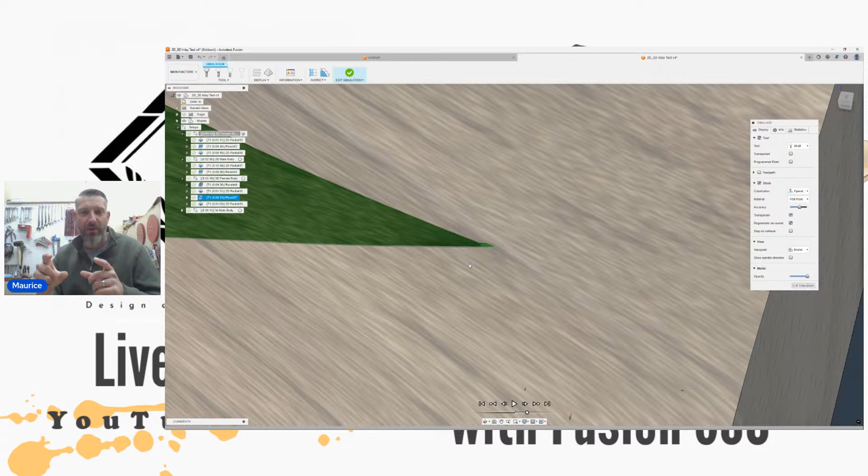The difference is if I have it down, it's not as labor intensive on my computer. If I have that all the way up, my computer will get really choppy. But same concept. It did the other corners just like it. Tight corners, the walls are completely done, and it had that 15-degree chamfer all the way where there was contact with the engraving bit and that wall.

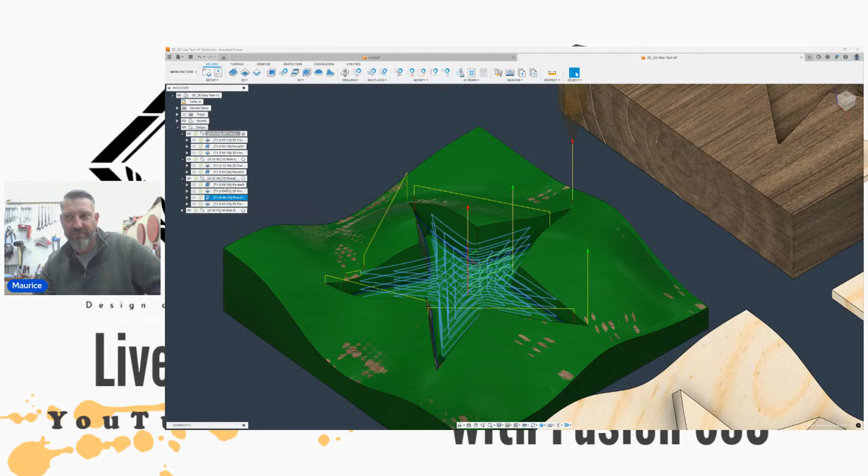Let me exit out of this simulation. I came back in with the same bit because I don't want to change out tool bits, and I cleared out the rest of those islands. These are not long tool paths at all. The engraving of that outline of that star was 13 seconds. The other one was a minute. The 3D profile cut was about 10. So not bad-ish.

Then I'll show the male side. The male side I cleared because I didn't want to touch that star. This bottom here is about 0.75 inches of material that I don't want my tapered ball nose to come in and try to clear out in one pass. So I removed a bunch of material, and it just makes the 3D carve a little bit better and a little bit easier on the tool.

What I did do is I used the same concept for that parallel. When it's doing these parallel passes, it's skipping everything along this star, and then my engraving bit will come in later and clear that out. I did not want that to interact, and it got really close. There were a couple of points where it started to come in, and this tool is not a tapered ball nose but a straight ball nose, a quarter of an inch, and it's hogging out a lot of material.

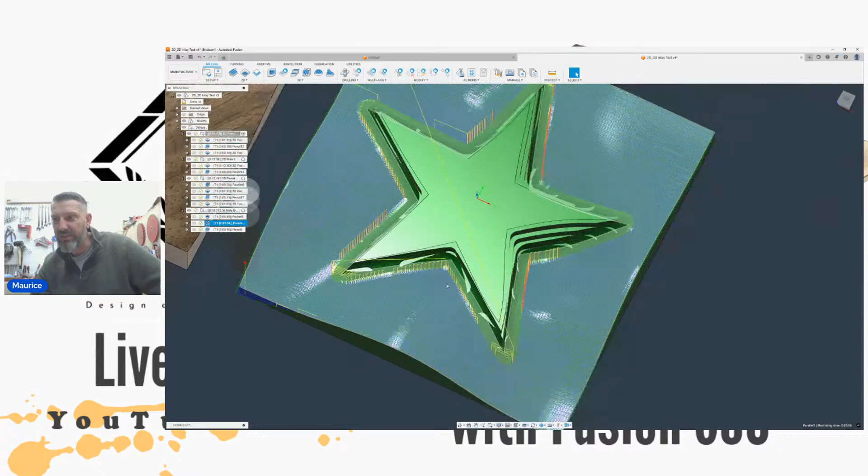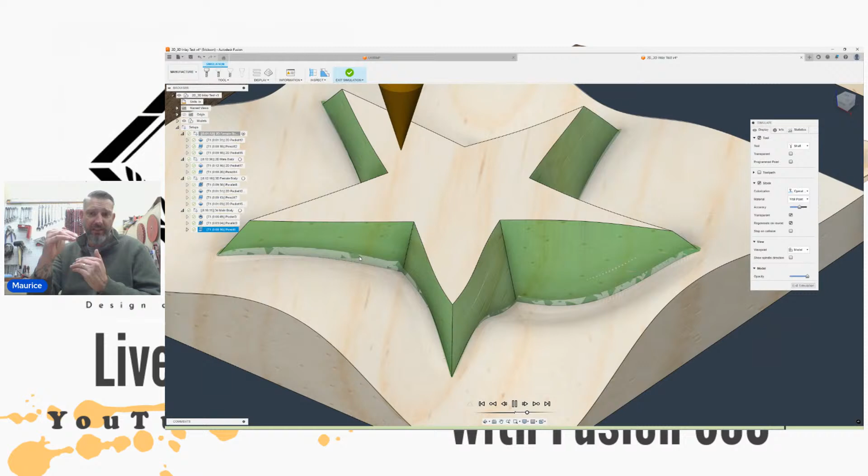I am still 0.1 above where the bottom of these walls will connect. So it's no concern that I have material here. It's just excess material that I didn't want the ball nose to interact with, and it's left over. Again, not an issue because it will never contact it because it's 0.1 above it.

Matter of fact, let me turn off transparency and you can actually see the crevices. So it went in, but it left that ball nose radius in there. When this gets put on, you'll see this in between the little slit of that 0.1 deviation, and it won't touch that female portion. But that is basically it.

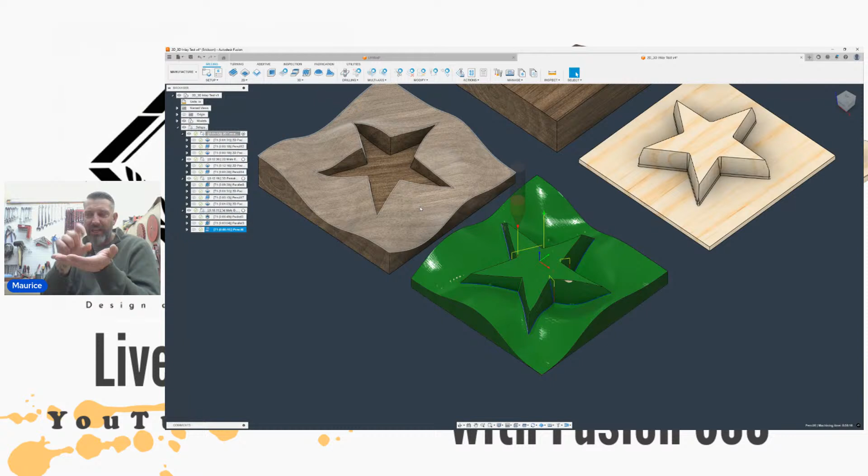When these things come together and they glue in, what I'll do is, let's get out of this, I will create another tool path. I won't do it here because I'm waiting for the final distance of the male plug in relation to the female bottom. I know the distances of my male bottom, but I think there'll be deviations on the overall thickness of where I'm at with my Z height on my CNC machine.

Once I know that dimension, I'll model it, and it will clear everything out, and then it will put the same profile as its own separate cut, and it will cut all that topping off. Should be pretty fast, but I just don't know the thickness of the material yet. Once I get it in the machine and have the raw materials in hand, I'll know pretty quick. That's why I haven't programmed that in yet.

But that should get me to this, where the plug is in, and in theory, if everything's done right, accounting for tool deflection and accuracy of the CNC machine. Again, I have a belt-driven drive, so I have to take the belts into account, so I can't go as deep and as fast as I want to. But if I take all that into consideration, I should have 100% tight seams on those inlays.

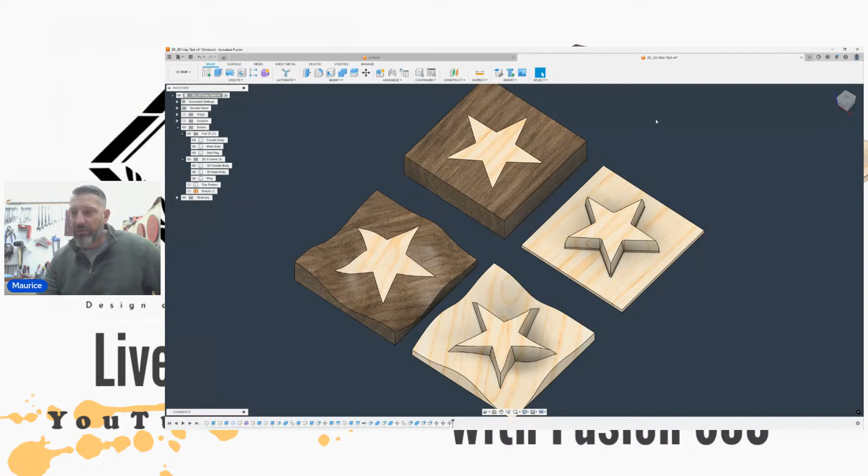So the whole purpose behind this was, one, to prove that it is possible in Fusion to model it, do all the tool pathing, and actually create it. The other purpose was to make a big wavy flag, and I will V-carve inlay maple into the union on that. So we'll do a proof of concept just for the test fits. I have some walnut, and I have some excess curly maple that I don't have a purpose for. So this will be curly maple, and this will be walnut.

And the curly maple, I'm planning on using the curly maple for the big flag, and I just want to see how well the edge lined up with the material of the curly maple. Curly maple, it's really hard, and the curl it's brittle, and I just want to see how it interacts with it. If it chips out right away, or if something really crazy happens, I can put all that stuff in there. So that'll be the test cuts.

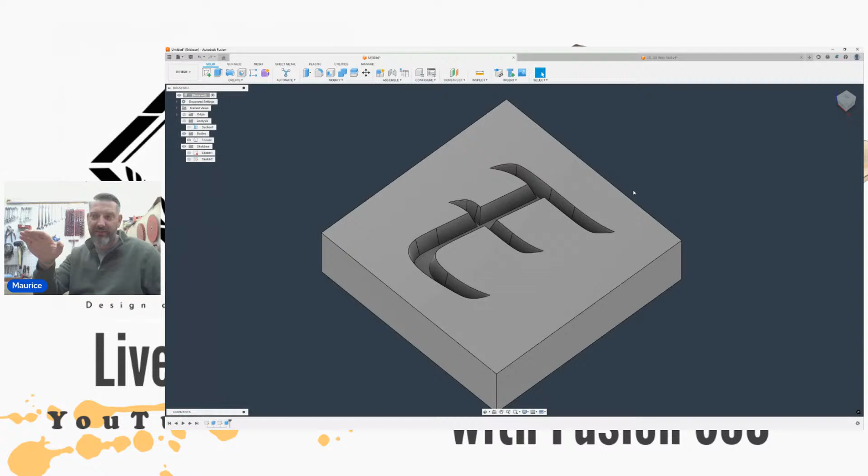And what I'll probably end up doing, I kind of showed this just earlier. I didn't go into depth, but doing the same thing on curves, lettering, getting the same result, but getting that into the 3D portion. And again, I mentioned earlier that drafting tool has some limitations, and the limitation is this spline, this curve, and it doesn't like it. And there's some things that I can do to overcome that, and how the actual drawing interacts with the surface. So I've been playing around with that. I think I figured it out, but that will enable some really cool lettering and some other really intricate inlay design work. So definitely not impossible.

Would most people say that this is preferred or not preferred? I'm still on the fence; it's probably not preferred, because V-Carve Pro can do this really, really fast, and you can input exact parameters on how much glue gap you want based on the surface, a whole laundry list of things, and it calculates it very, very fast. This goes through a more methodical method of doing that. But again, this was all to correct the star being deformed. And this is the only way I could figure out how to do that. So definitely not impossible, is possible.

So let me go through the chat log here and just see if I didn't miss anything. If you left a comment or a question in there, I'll dig it out. Let's see. Sharp corners. Yep. I got the taper ball nose.

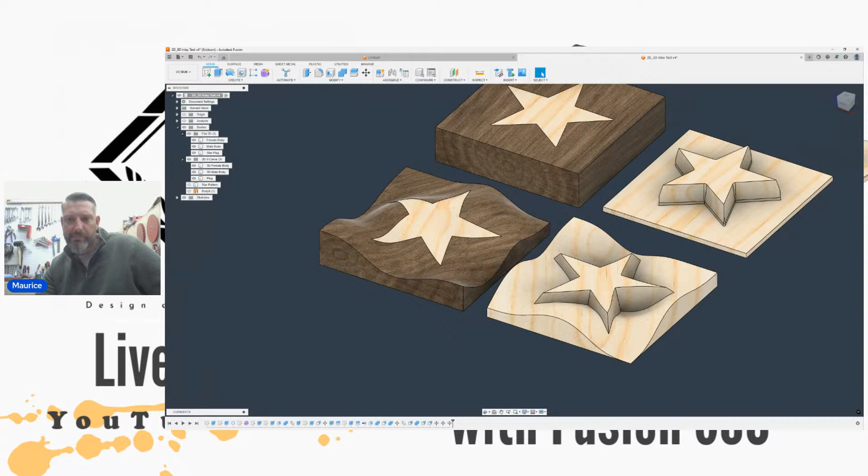Let's see. Let's look at this one. Nature Live Edge: I think you should give the curly maple a shot as the wave reflection on light and stars. Yes. Very, very true statement. I love doing wavy flags with curly maple because the light hits it at a certain, it shifts. So as you're shifting around the light and how you visualize it, it looks like it's wavy because the light's hitting the curly in a different way. It's super awesome. This flag is just pure hard maple and it doesn't have that same effect, right? If I shift the light, this is the color you get. And it is what it is. But man, curly maple on a wavy flag, it looks spectacular. It looks really good.

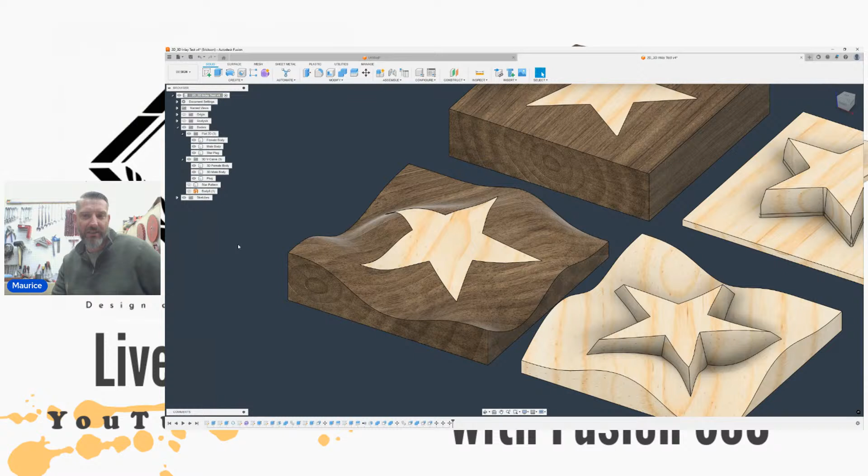And then a whole laundry list of videos on a CNC machine that I'm getting ready to purchase. I think I've landed on Stepcraft with the automatic tool change and some of their systems that they use. So I think I'm going to bite the bullet on that and get that purchased probably early next year. So that'll go through.

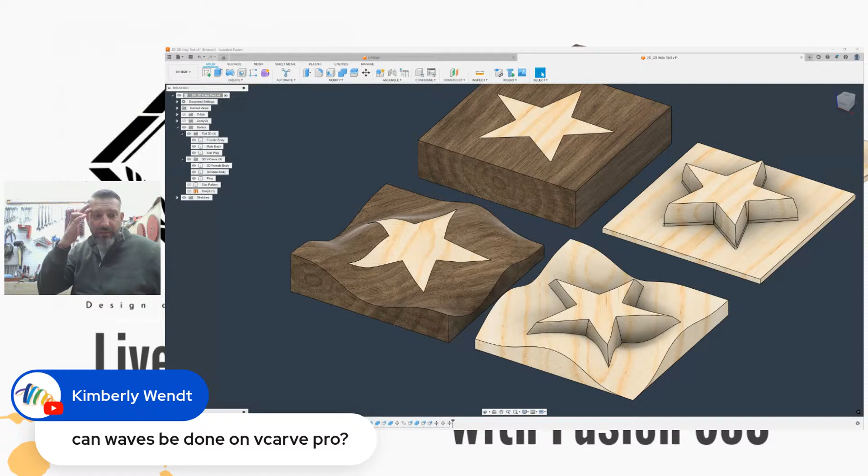And Kimberly, can waves be done on V-Carve Pro? Yeah, actually, I'm not 100% sure. I would default to somebody else that's more familiar with V-Carve Pro. I'm not too sure. So when you start going onto a wavy 3D surface, things get really, really complicated really fast. How the plugs interact.

Just modeling this took a little bit of time to really figure it out and how this plug entered into the surface. And that's why a lot of people's stars are just deformed. But there's ways to overcome it. I just don't know if V-Carve Pro will do that for you or not. I think Vetric, if I remember correctly, you can project a sketch, a drawing onto a surface, and it will project it downwards. But then how you interact with that, with the tool pathing and everything else like that, I'm not versed in.

So I think eventually, I'll maybe subscribe to Vetric and V-Carve Pro and start playing around with it. But right now, I'm pretty invested in Fusion 360. All right. I don't see too many other questions. I think I hit the majority of everything.